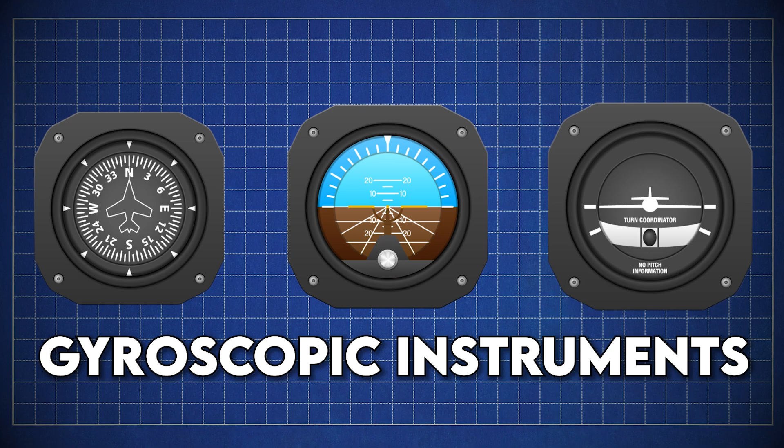Also known as gyroscopic instruments, as the name implies, these three instruments take advantage of gyroscopes to accomplish their mission of giving the pilot information on the heading, the attitude, and coordination in flight.

Gyroscopes have a very useful property in the aviation field, and this property is called rigidity in space. This is the same property that keeps a top vertical while spinning. When you spin it, it keeps spinning and doesn't easily change direction. Now, a gyroscope is just a fancy version of a spinning top.

It has a spinning wheel inside of it that can freely rotate in any direction. When the gyroscope is set in motion, the spinning wheel creates a kind of spin force that wants to keep the gyroscope spinning in the same direction. Just like this, it doesn't really want to tip over like when you spin it. This spin force is what gives gyroscopes their special ability.

If you try to tilt or move the gyroscope, it pushes back in the opposite direction to resist the change. It's like it has a mind of its own, wanting to stay in its original position. This ability of a gyroscope to resist changes in its orientation is called rigidity in space, meaning the gyroscope's spinning wheel wants to stay in the same direction, no matter how the rest of the world or plane is moving around it.

All these instruments have their own spinning gyroscopes powered by either the electrical system or a vacuum air pump spun by the engine. If there is an issue with these instruments not working, it can usually be attributed to the vacuum air pump providing insufficient air pressure to the gyros. The gyros are then connected to the interface by links and delicate rods to detect small changes in the force being applied by the gyro.

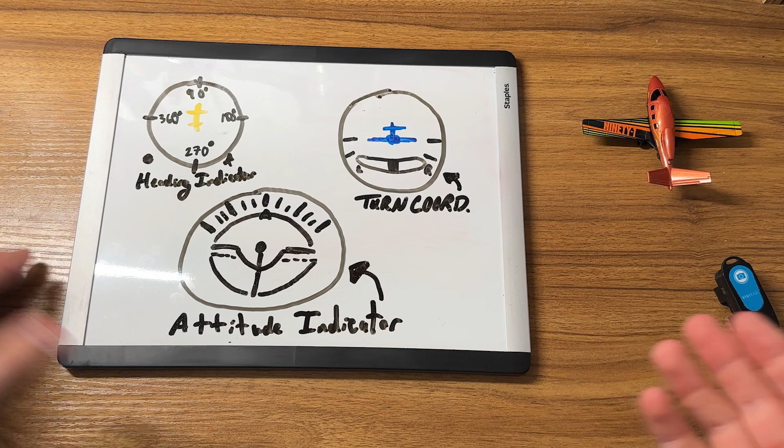It's only working when they're running. Since the gyroscopes also turn off with the plane, if you turn off the plane on the ground at a heading of 60 degrees, or 90 degrees in this case, someone moves your plane over to make room for their Rolls Royce. Let's just go ahead and use this example right now.

My Rolls Royce has not come in yet. So let's just act like this is a Rolls Royce.

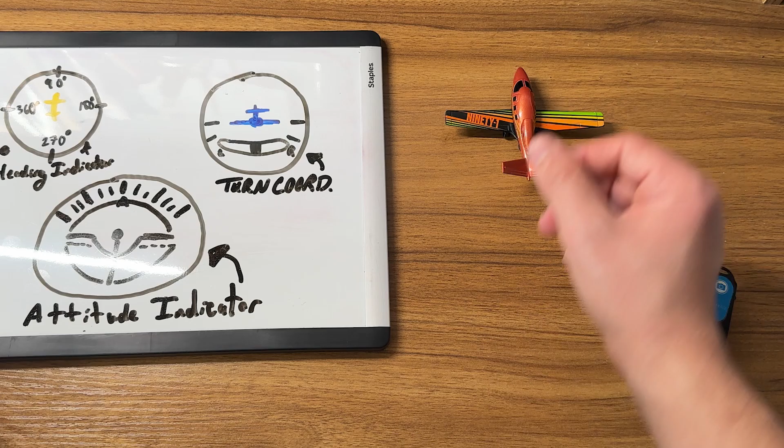When we have the plane right here at a heading of 90 degrees, we're going to turn it off. The gyroscope in this actual indicator is going to be turned off and stuck on 90 degrees. Here's little Warren Buffett with his Rolls Royce - I don't even know if he has one, but he wants to park his plane right there.

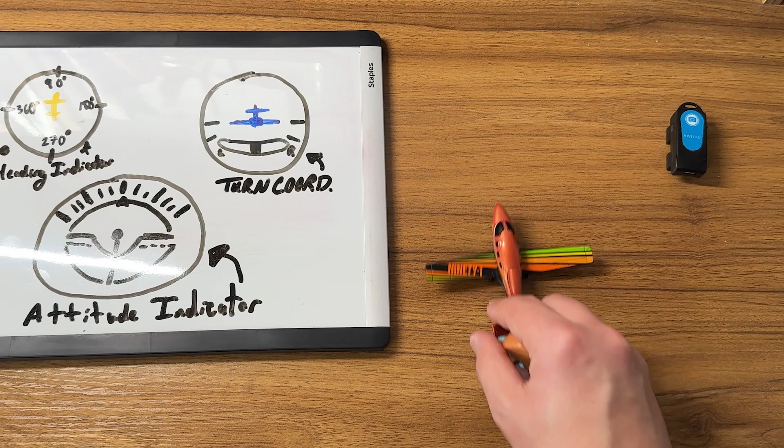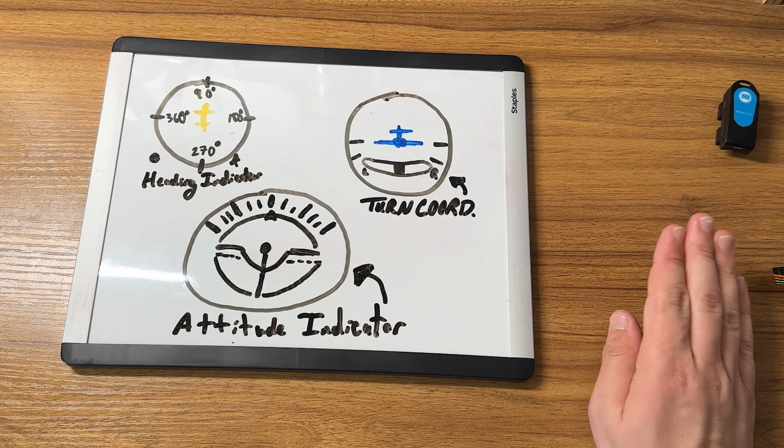He's going to tow it and move it to a heading of 360, moving his Rolls Royce right there. Next time you turn on the plane, it is going to be saying the heading is here, but you're actually headed right there. That can be absolutely detrimental in a variety of different flights. But when you go back to flying, the heading indicator will still be at 90 degrees. Can you tell I've made this mistake before?

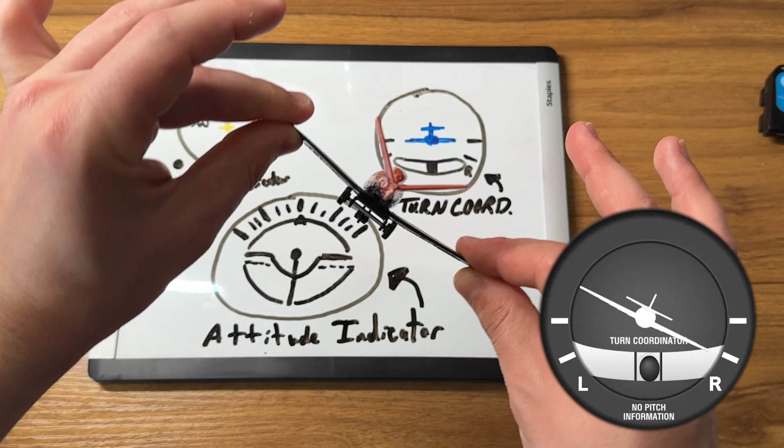The second part of the six-pack is located at the bottom left or the top right in this drawing, and it is the turn coordinator, which indicates the direction of roll, the rate of turn, and slip. It indicates the rate and direction of roll, which is how you're going to be turning, just like this - a little reminder from episode 1. And any slip, which is nose outside of a turn, or any skid, pointing into a turn - all that indication is considered the yaw of an airplane.

The roll is clear to see from the instrument as the little plane rolls left or right. So does the big one you are sitting in, laying in, or standing in.

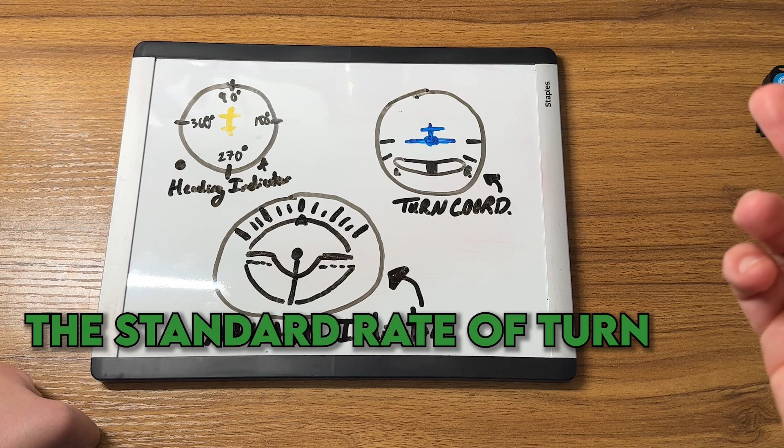The rate of turn is indicated by the little white tabs on the left and right - if you ever forget, there's a little L and a little R. When the wingtip on either side is in line with the lower white tab, you are making a standard rate of turn, which is 3 degrees per second or 180 degrees per minute. This means if you were stuck in a cloud while flying and need to turn around to get out of it, look at your watch and this instrument. Make a standard rate of turn to either side until the wing is in line with the white tab. Wait 1 minute to go back to straight and level flight, and you will find your way out of the clouds soon enough. Or you could just use your heading indicator - that works too.

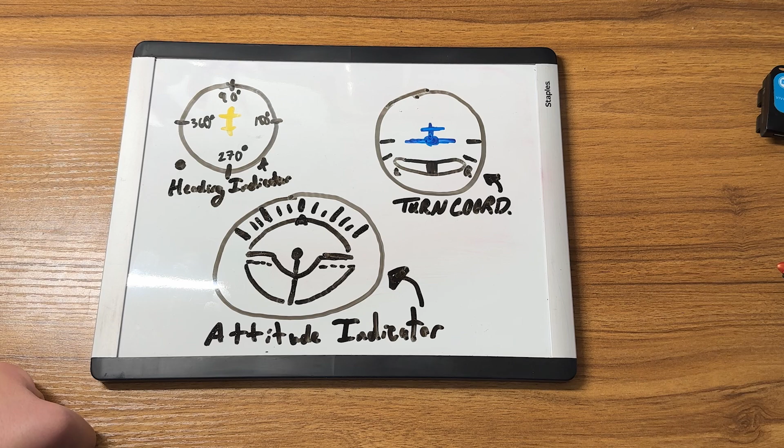The slip or skid indicator is on the bottom of the instrument. It's also called the inclinometer - a very weird word to say that no one ever uses, but it's also called that. This measures the yaw of the airplane, which is the orientation of the plane with respect to the vertical axis, just like we talked about in episode 1.

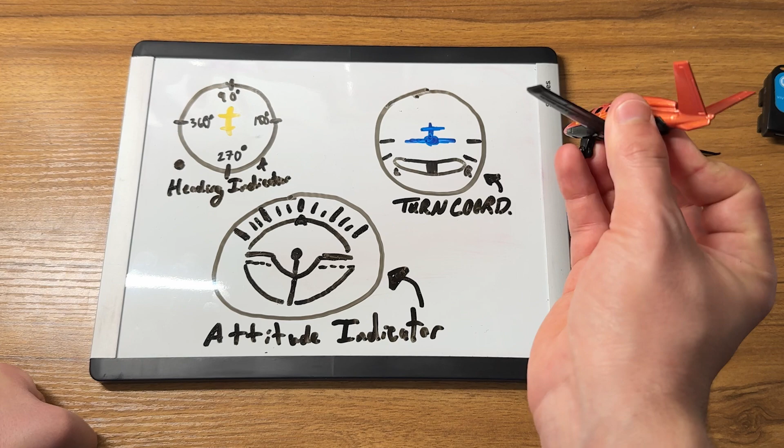When the little ball is on the left side of the plane - this little black knob is actually a ball that can move a little bit to the left or right - this just indicates that the tail is either to the left or right. When the ball is in the center of the two black lines, then your nose and tail are pointed in the direction of the turn and you're considered coordinated. If the little black ball is moving to the left or right, you are in an uncoordinated turn.

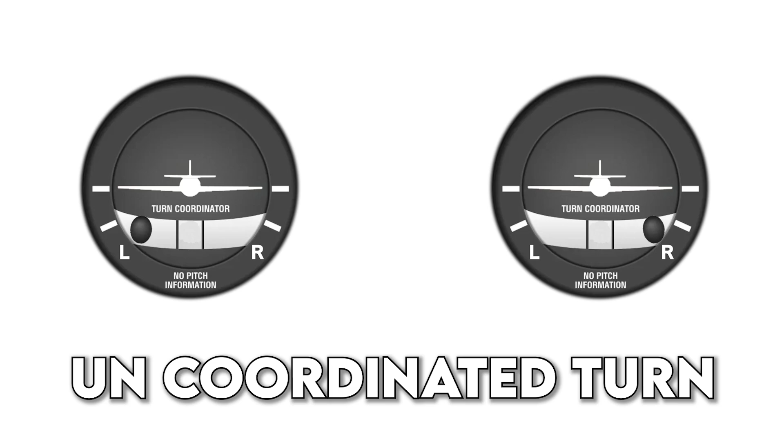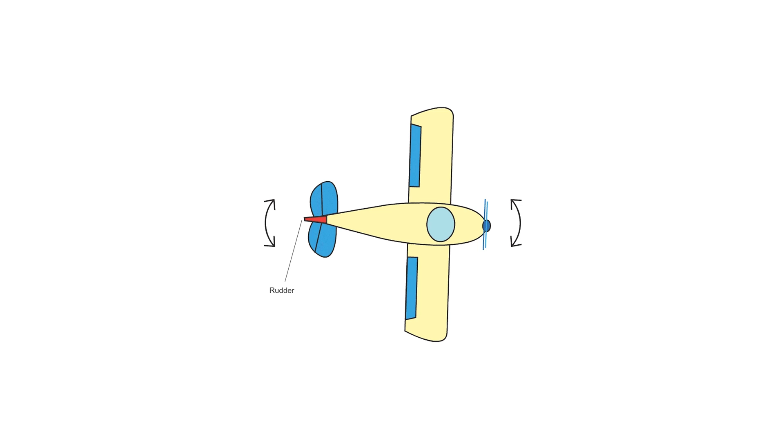To fix this, you will step on the ball - that is, push your foot on the rudder pedal at your feet on the side that the black ball is moving towards. This moves the rudder, typically the vertical control surface on the empennage, in the direction you are stepping in, effectively adjusting the yaw of the airplane before it becomes an issue.

The instrument's vacuum or electrical system is usually running separately from the rest of the gyros, typically electrically too, to make sure you at least have this instrument in case the main vacuum pump fails.

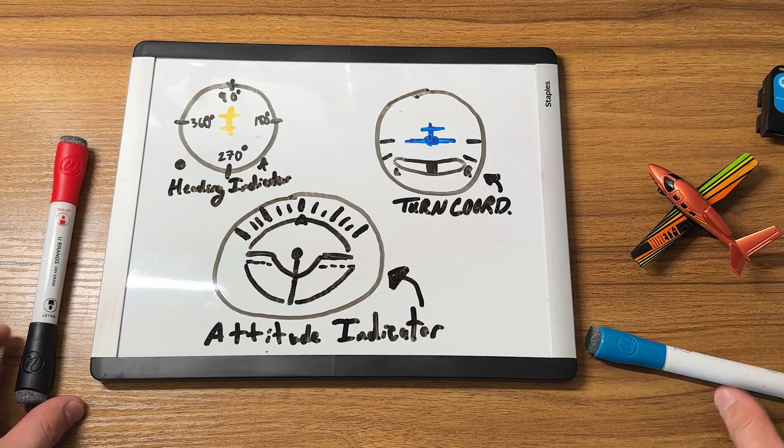The last gyroscopic instrument we are going to go over is the attitude indicator, or the artificial horizon. It shows banking information just like how the turn indicator does, and how high or low the nose of the plane is pointing, aka pitch information.

The banking information is displayed with the white lines - they're black here, but it's a white board - and an arrow at the top of the instrument. Each line symbolizes 10 degrees to the left or right in roll, and a skip to 60 degrees right over here. The pitch is displayed as the artificial airplane in the middle, which can be adjusted with a knob on the bottom that I did not draw in as well.

That's basically the knob, and the degree pitch lines above and below the artificial plane. I'm not sure why they really call it an artificial plane anyways. I mean, aren't all planes artificial?

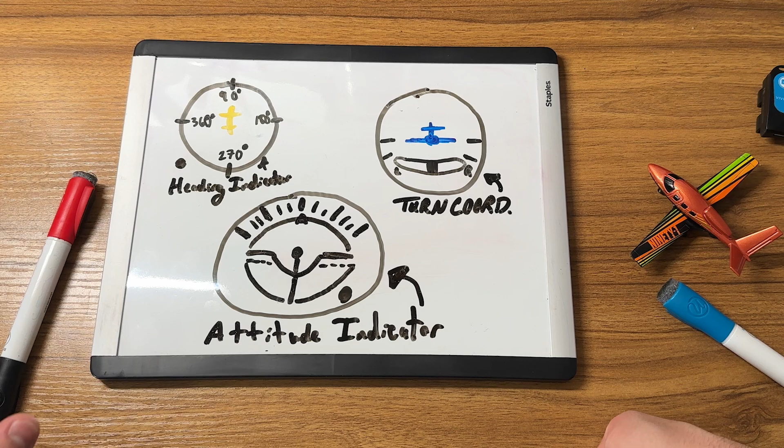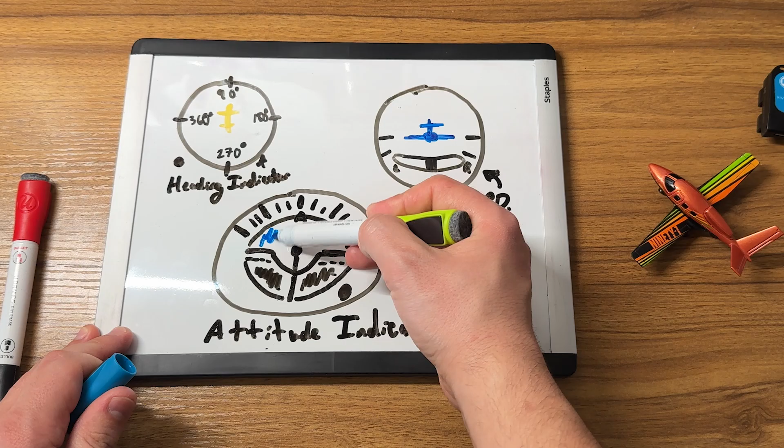The last important bit of information you need to know is it's always blue over brown, or black, depending on the indicator, but blue is always on top. That means the blue, or artificial sky, is always meant to be on top of the brown, the artificial ground.

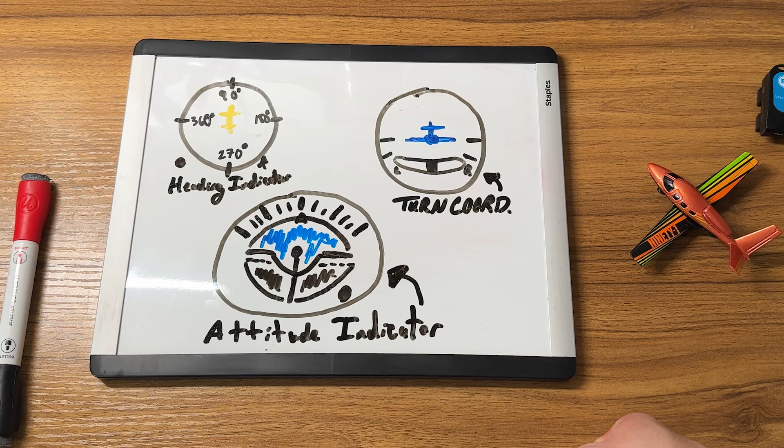It may sound simple, and what situation would ever make that information useful? Well, I'm glad you asked. It's when you have no reference to the horizon anymore, like in a cloud or during a dark night where the horizon blends in with the sky. That's when it's very useful.

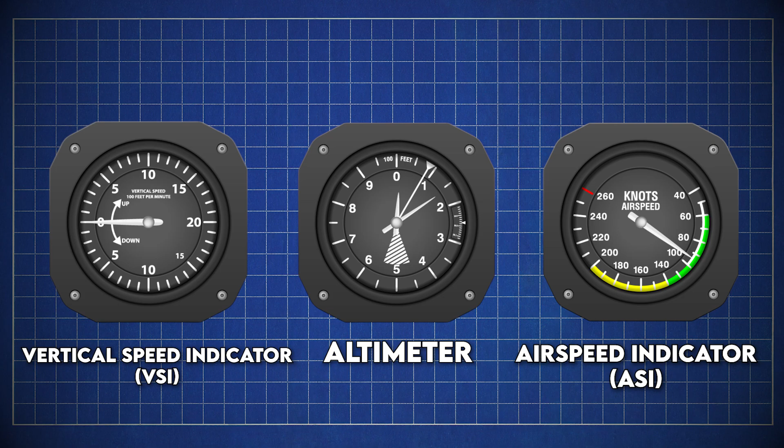The last three instruments we're going to go into detail on, and we're going to go into a lot of detail, in the standard six-pack are the vertical speed indicator, or VSI, the altimeter, and the airspeed indicator, or ASI. These are all made possible by the Pitot-Static system in the aircraft.

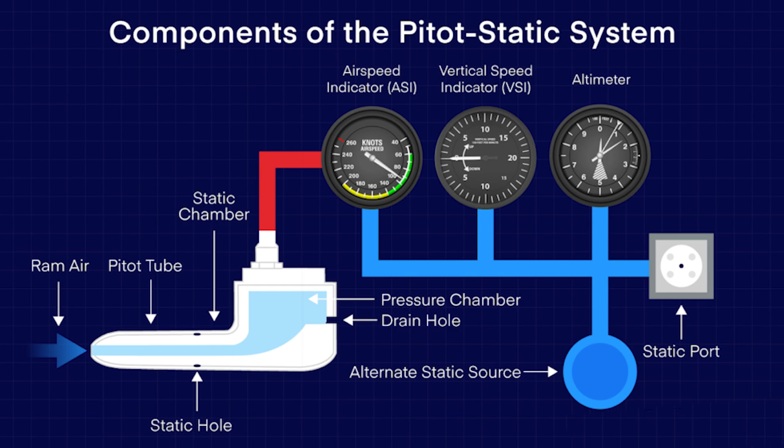To understand how the system works, you have to understand the two different parts, the pitot and the static ports. The static port is found flush on the side of the aircraft, which on this little guy is going to be right about here. It captures non-moving air to measure atmospheric pressure at all times.

Measuring atmospheric pressure is constantly important because it has many variables it can change with, including air temperature and elevation. On long cross-country flights with lots of changes in these variables, atmospheric pressure can change every minute. All three instruments - the altimeter, VSI, and airspeed indicator - use the static source to constantly check atmospheric pressure for instant and accurate readings.

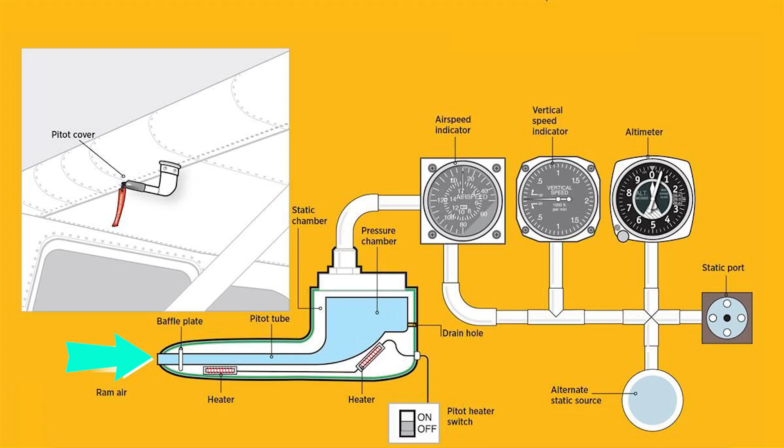Then we have the pitot part of the pitot-static system. The pitot tube is typically located on the left wing of training airplanes, pointed forward to capture ram air. Ram air is the air that the airplane comes into contact with while in motion. I remember it as the air that the plane rams into.

This air is higher pressure than the static air and only increases in pressure the faster the aircraft is moving. The only instrument that takes advantage of this tube is the airspeed indicator, and this is going to make a little more sense soon. So, pitot-static system, let's go.

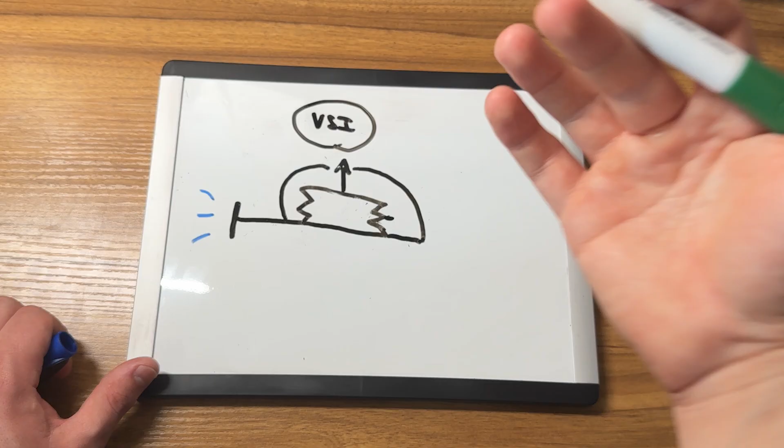Let's start with the vertical speed indicator - it does what the name says, telling you how fast you're ascending or descending in feet per minute. It works by taking the static air and feeding it into a capsule, also known as a diaphragm, in the instrument, and then feeding it outside the capsule through a small calibrated leak.

The inside of the capsule has the air pressure for the current static air coming from the static port, while the outside of the capsule has a 3-second delay of the air pressure from about 3 seconds ago. The capsule will then expand or contract if the outside air pressure is higher or lower, and the instrument displays this expansion and contraction as a reading in feet per minute.

It's important to note the instrument has a small lag, since there's a small calibrated leak, comparing the air pressure right now versus about 3 to 5 seconds ago. So if you climb a couple hundred feet, you'll be in an area of lower pressure now than you were 3 seconds ago. This makes the diaphragm contract a little and indicate a climb on the instrument.

The two flaws with this instrument are that it's a delayed instrument, which isn't very good, and it relies solely on the static tube to feed it air. If the static tube is clogged, it would read 0 or get stuck at the last indication, no matter what your vertical speed actually is.

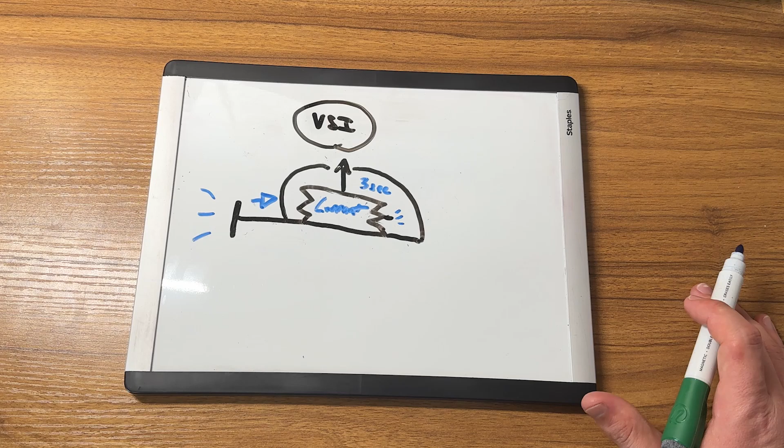At a certain point in the last 100 years, pilots found out the hard way that if we fly too high, the air gets too thin to breathe, and we would fall out of the sky. Thus we invented the altimeter, because carrying an 18,000 foot ruler was just too heavy. The altimeter will become one of the most used instruments in your flight training, and we'll be going over it for a good minute so you know exactly what you're talking about when you take your exams.

The altimeter's job is to measure the difference in altitude between you and sea level, effectively telling you how high you are. It accomplishes this in a similar way to the vertical speed indicator, except with no calibrated leak. The static port fills the diaphragm with static air, while the diaphragm itself is covered in air similar to sea level air pressure.

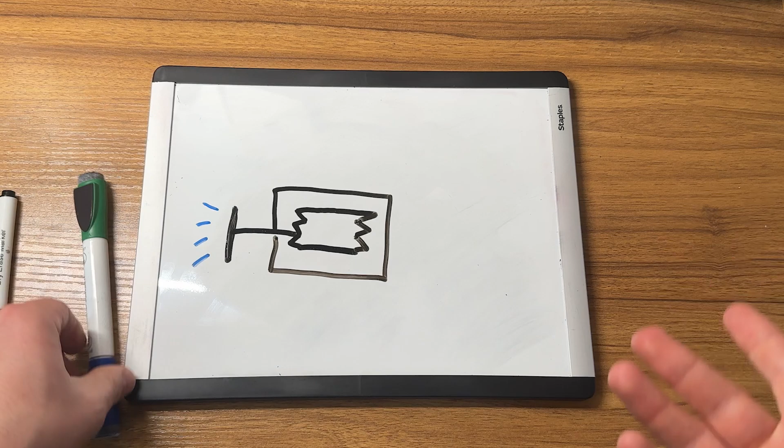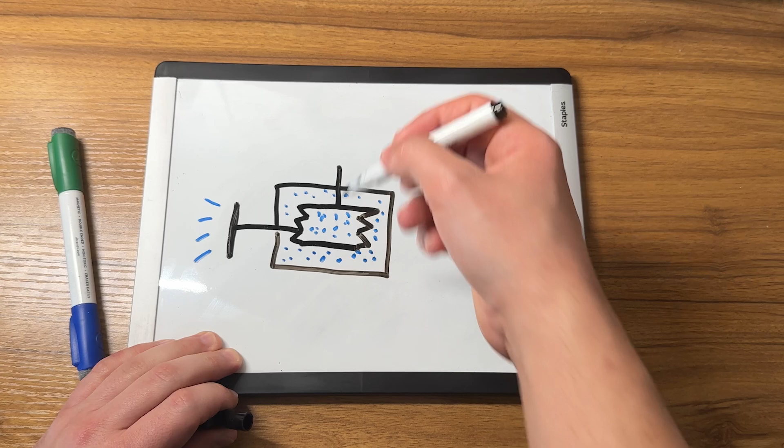So there's one air pressure outside of the diaphragm, and another air pressure inside the diaphragm. The diaphragm expands or contracts according to the actual air densities, giving you an actual altimeter reading.

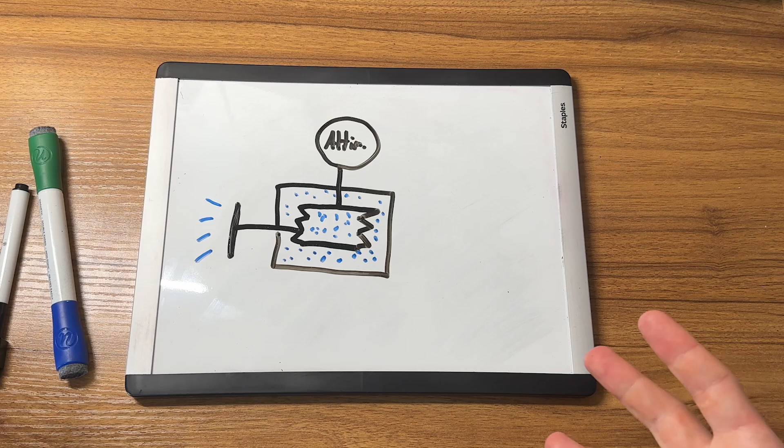To read it, you look at it just like hands on a clock. The smaller hands read bigger increments, and the bigger hands read smaller increments. The smallest hand counts 10,000 feet above sea level, just like the hour hand. The middle hand is middle length and represents 1,000 feet above sea level, like the minute hand. The longest hand represents 100 feet above sea level, like the seconds hand.

The main issue with the altimeter, other than the fact that this is not a great drawing, is the same issue the vertical speed indicator had: if the static port is clogged, the altimeter will stay stuck at an altitude reading no matter the change in altitude.

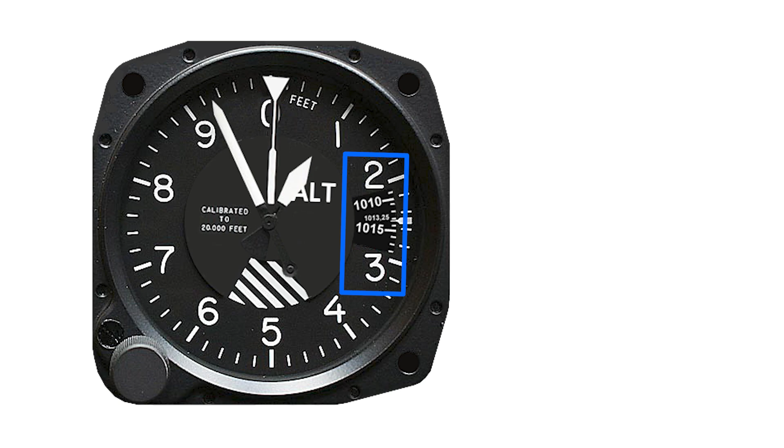This is a great time to talk about the different types of altitude. You may notice there are some tiny numbers that don't seem to mean anything. That little window in an actual altimeter is called the Kollsman window, and the number in there is called the altimeter setting. It's typically provided to you from air traffic control or ATIS, the Automatic Terminal Information Service. More on all of that later.

In the Kollsman window, you must adjust it according to the current setting to get an accurate above-sea-level reading at all times, since atmospheric pressure can be constantly changing. The altimeter setting is an adjustment you make so that you're actually reading accurate height, and therefore true altitude will be shown no matter where you go.

If you do not correct the altimeter setting on a long flight, you could, for example, be expecting to be at 3,000 feet above the ground, but you're really at 1,000 feet above the ground—much less room for error, and a ton of other legal issues.

You might also be thinking, Brad, why would the altimeter even bother to tell me the altitude above sea level when I have to adjust it all the time? Oh wait, you have another question—why can't it just tell me my altitude above ground level? I don't even fly anywhere near the ocean. First off, thank you so much for both of those questions. I always fly near the beach, so I can't really relate. But you do bring up a good point.

The reason we use above sea level so often is because above ground level changes so much more often—mountains and stuff—and it is less consistent, while sea level is an average that we all can agree on.

Let me get a new whiteboard so I can talk to you about different types of altitude. Just drew that—look at that little mountain and the above ground level. So neat. There are other altitudes you will need to know to stay safe and to ace your exams.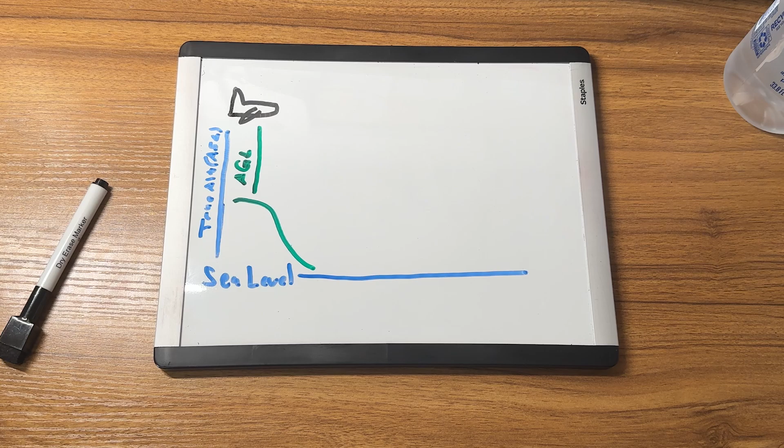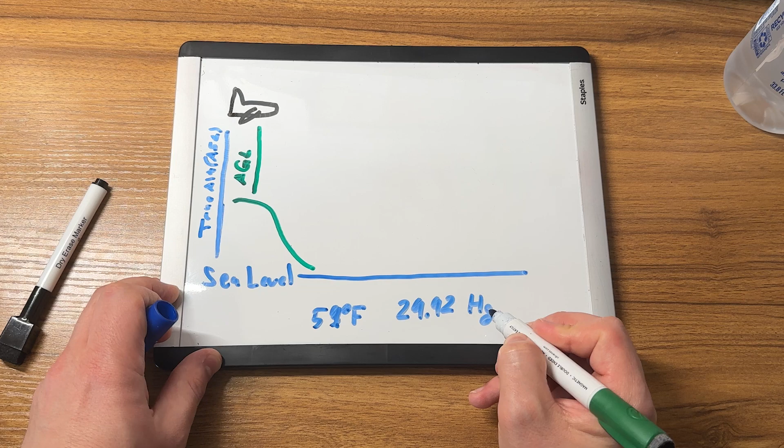There is also indicated altitude, which is exactly how it sounds—it is whatever your altimeter indicates with no corrections for non-standard atmospheric conditions. It's good to remember that standard conditions are about 59 degrees Fahrenheit, as well as 29.92 inches of mercury at sea level. We'll get into that a little more. To get the above-sea-level altitude from indicated altitude, you adjust for non-standard conditions, unless you are living a standard day.

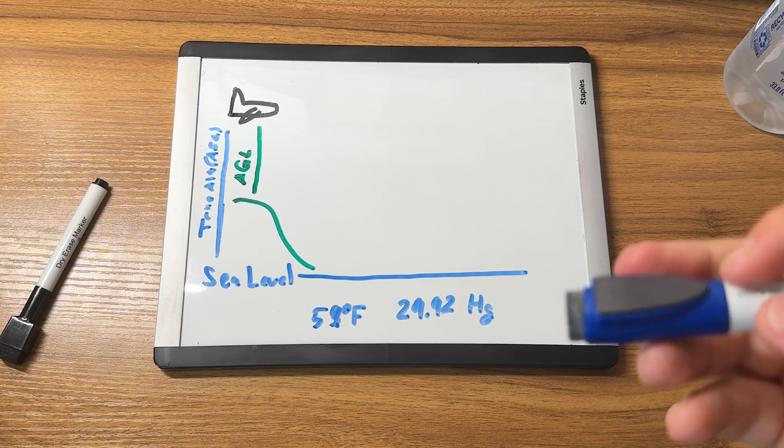Then you can take above sea level and take it to above ground level by just subtracting the ground's elevation. So if you're actually at 1,000 feet above sea level and there's a 500-foot mountain, you're only 500 feet above the ground. There is then pressure altitude, which is useful for flights over 18,000 feet.

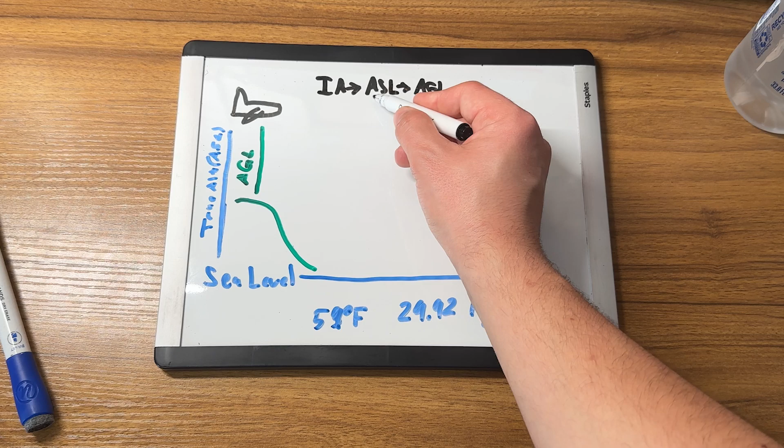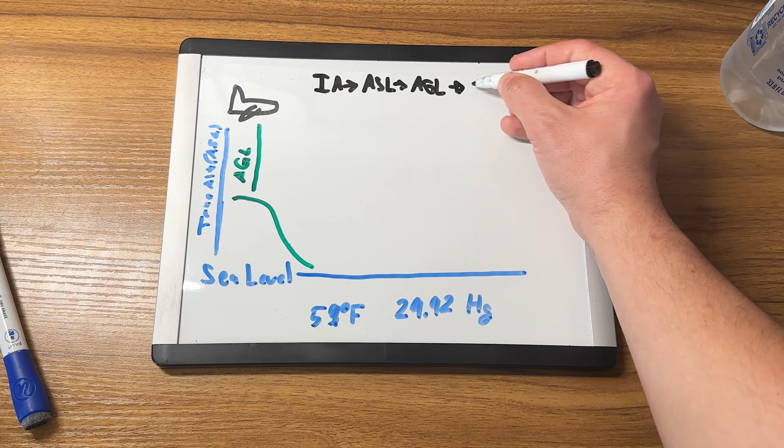Here's a little drawing real quick. You could just remember indicated altitude corrected for all the non-standard days is going to be above sea level, which is the true altitude. We can subtract the ground elevation to get above ground level. Then we get into pressure altitude, or PA for short.

Again, useful for flights over 18,000 feet and testing aircraft performance. Pressure altitude is the altitude above the theoretical plane where atmospheric pressure is the standard 29.92 inches of mercury. To calculate pressure altitude on the ground the long way, you get the altimeter setting and input it to your altimeter to get the indicated altitude. A little complicated, but it's way easier to do in flight.

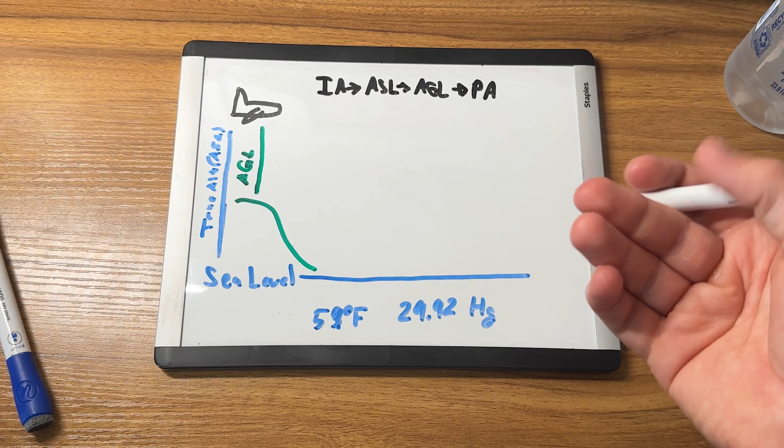You then take the altimeter setting to get the difference between that and the standard altimeter setting, which is 29.92 inches of mercury. You multiply it by 1,000 feet, because each inch of mercury equals 1,000 feet in difference, to get the altimeter correction. As an equation, the altitude correction equals the current altimeter setting, CAS, minus the standard altimeter setting, 29.92. Put these in parentheses, then multiply by 1,000, since each inch of mercury equals a 1,000 foot difference.

If we plug everything in, you take your indicated altitude and subtract your correction to get your pressure altitude. That's a lot of things right there, but once you do some examples, that will fix everything. So let me do an example for you.

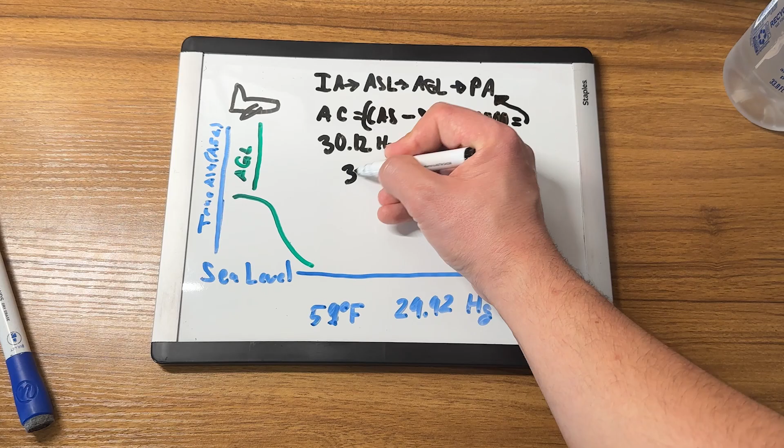If the current altimeter setting is 30.12 inches of mercury, and the indicated altitude equals 6,000 feet, you just plug that in: the CAS is 30.12 minus 29.92, and then we multiply whatever that ends up being by 1,000, which ends up being 0.2 inches of mercury.

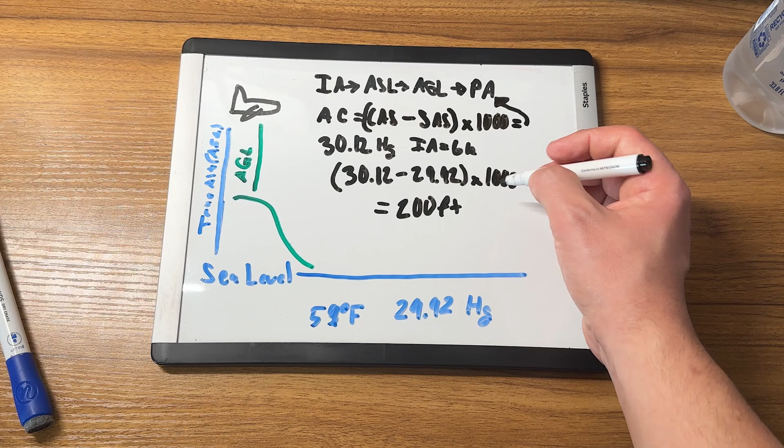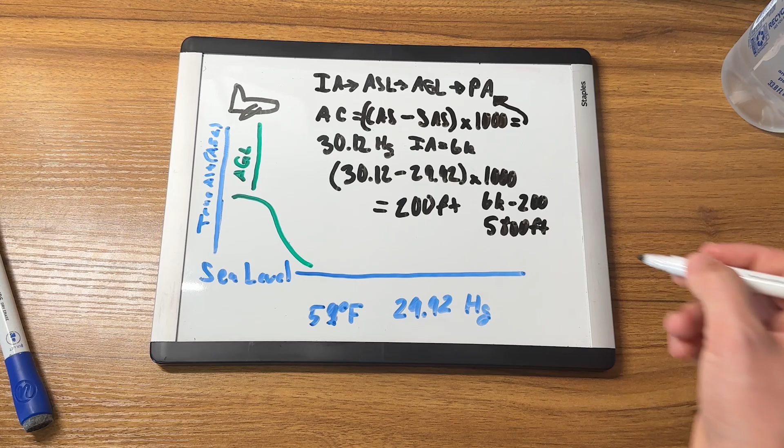So you multiply that by 1,000 to get 200 feet, and then you take it from the indicated altitude. The indicated altitude is 6,000, and this time we're subtracting it, giving us 5,800 feet. I made a bit more of a mess than expected, so I'm going to erase that — take a screenshot if you want it, and I'll be back in a second.

Finally, you have density altitude, DA, which is just pressure altitude corrected for non-standard temperature variations. Remember that — it represents the density of the air in relation to the standard atmosphere. It's used to assess aircraft performance as it affects engine power and aircraft lift.

So it's the most important one, and you're going to have to go through all of that to figure it out. For exams, or if someone throws an EMP into your airplane, you will need to know how to calculate these without a phone or calculator. That said, once you pass your exams and make sure no one brings any EMPs onto your flights, the app does it for you.

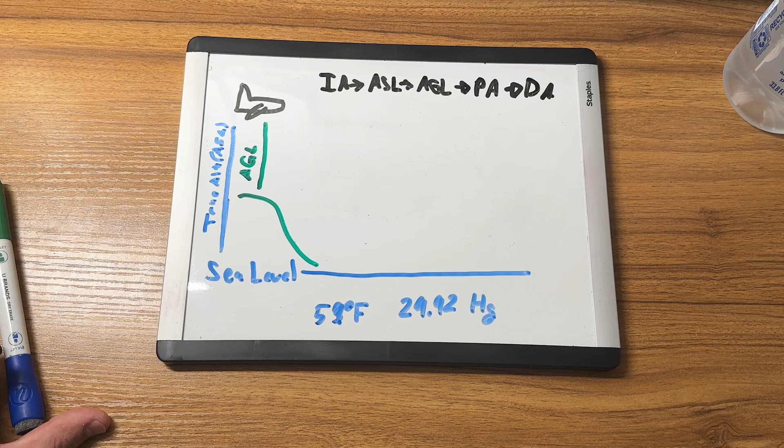Until then, here are your choices: you can memorize this equation, you can use this graph, that graph as well, or you can use an E6B calculator. Later, I'll show you how to use an E6B calculator in the flight planning video, but today I'll explain how to use the graph since it's quicker and you have to learn it anyway for your exam.

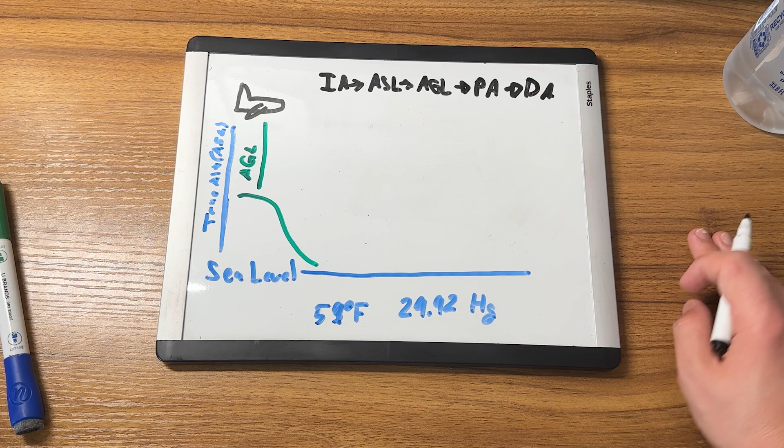Sweet, now give me a second while I go grab it. Look at this little density altitude chart that you guys are going to want to be able to use. First off, we can see it's not like a normal graph we'd usually use — the output is on the y-axis, and the input is on the x-axis, which is normal, but it's also just lines all across the page, and then there's a table.

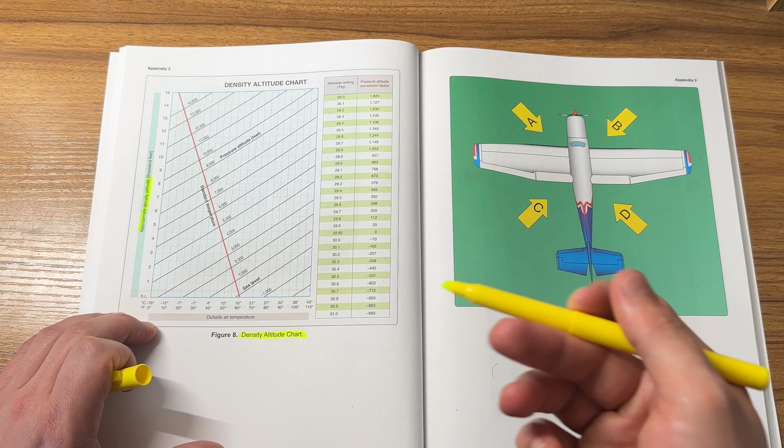What do we do? First, let's start by noticing the pressure altitude — that's where we need to start off. We need to finish through the example we went through earlier just to find that point. We can see there's a big line for standard temperature, which we could actually use for an example.

Let's go ahead and use the standard temperature, which is just going to be a little bit lower than 60, so 59 degrees Fahrenheit, which we could use. See that right there? Fahrenheit's right there.

Let's just say pressure altitude is going to be 5,000 feet exactly. So we literally just take the 5,000 right there, which is the pressure altitude. That's going to be our input. We're going to see the 59, and we're just going to follow a line up here. And once they cross, you go directly to the left.

As long as this line is basically straight, with standard temperature, pressure altitude is approximately equal to density altitude. And that is also assuming a normal altimeter setting of 29.92, which is the standard, and there's no line for that.

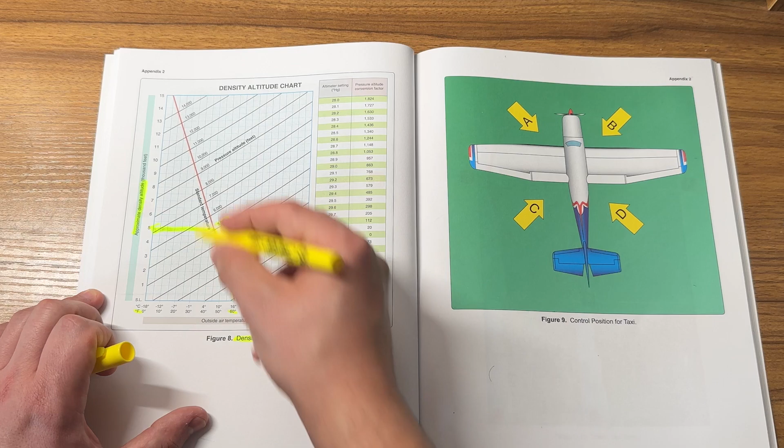If it was non-standard, let's just say an easy one, 28.8 even, we would be adding 1,000 feet, so the density altitude would actually be 6,000 feet. Does that make sense? Let me know in the comments if I did all right at explaining this.

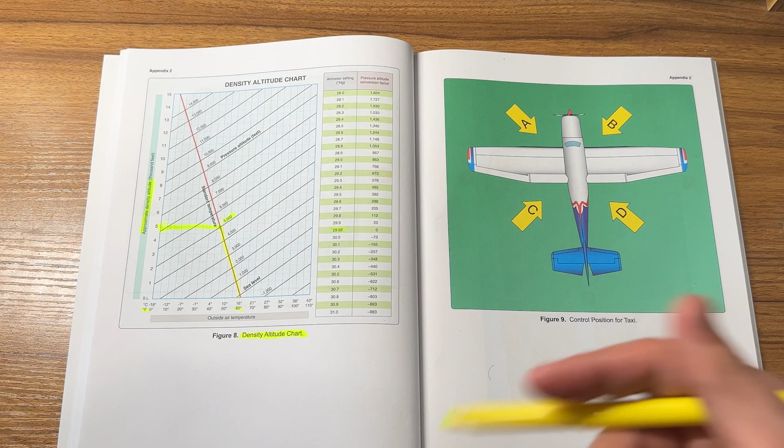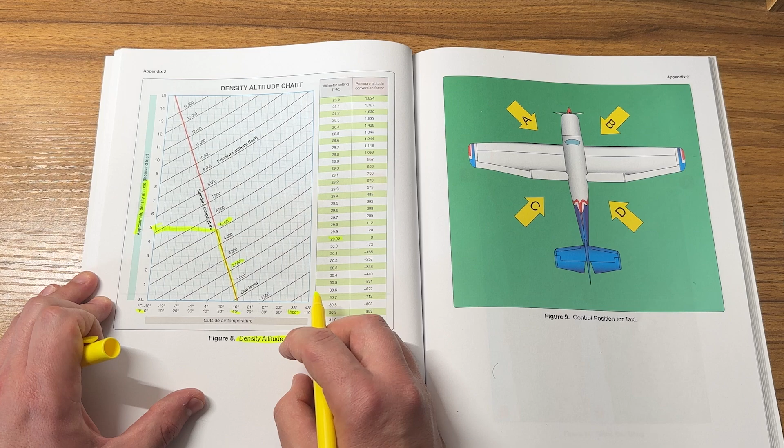Let's do another example. Let's say that the pressure altitude is 2,000 feet, and the temperature is 100 degrees Fahrenheit. All we're gonna have to do is follow about a parallel line, all the way to 2,000. There we go. And all we have to do is track that all the way straight to this.

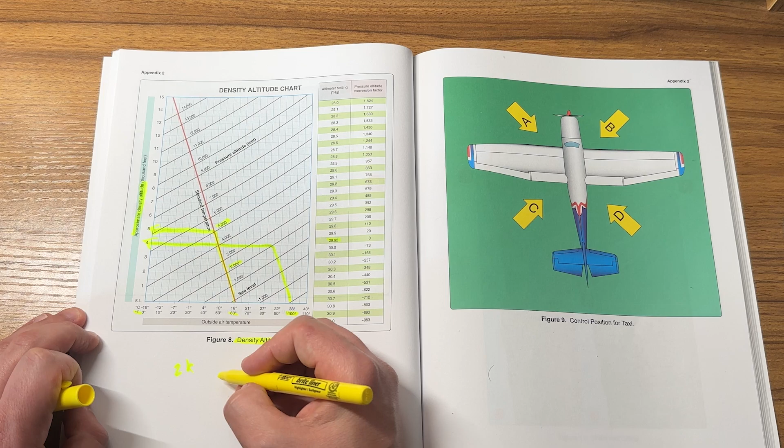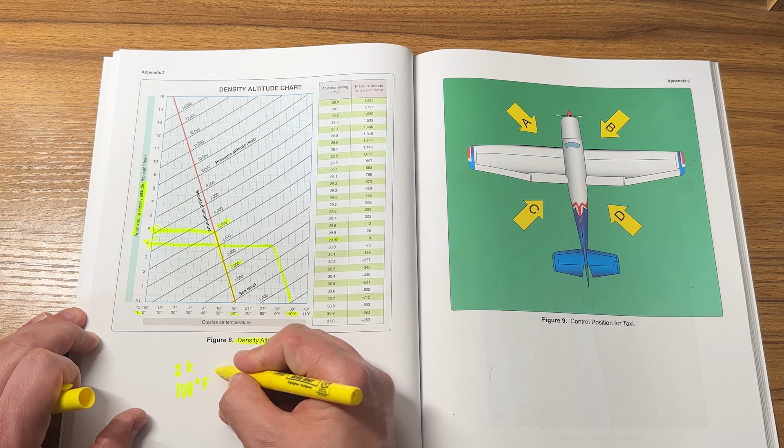What do you know? If you have a pressure altitude of 2,000 already, and you have a temperature of 100 degrees Fahrenheit, as long as the altimeter setting is 29.92, the density altitude is equal to approximately 4,000 feet. Look at that. CFIs fact check me later.

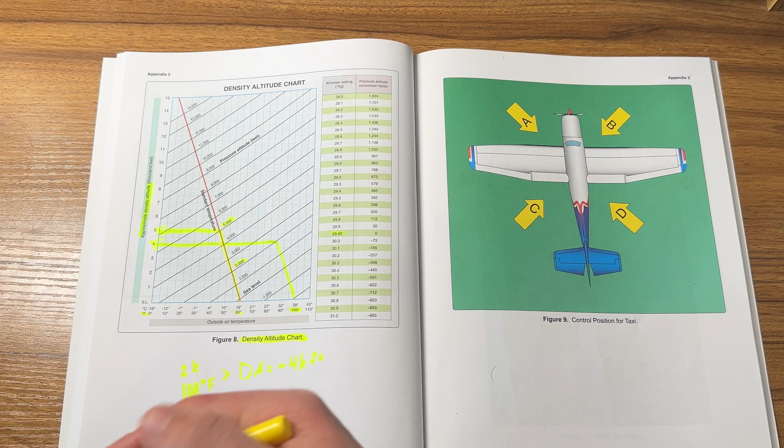Awesome. Sweet, we went through that graph, and congratulations, you don't actually have to memorize that equation at all. Look at you. Already done. And now you have density altitude.

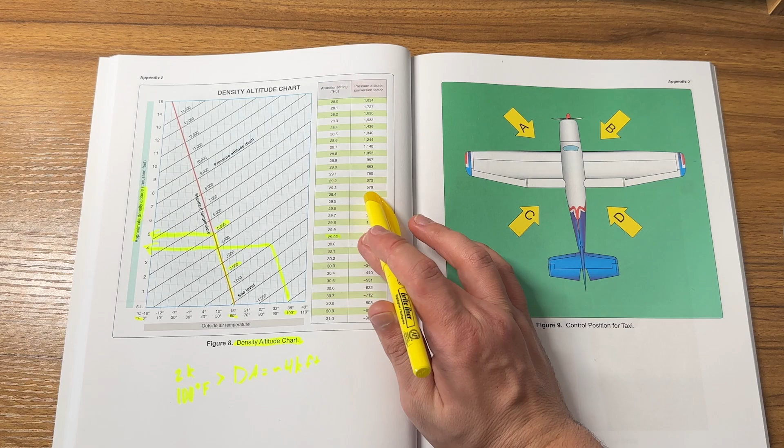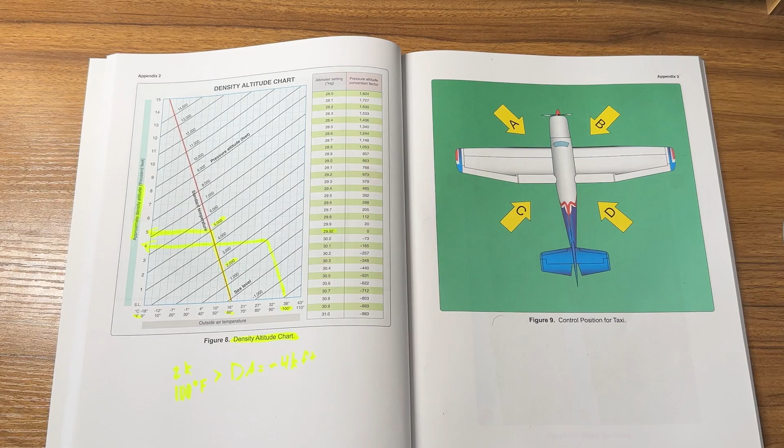Really quick, while I have you here, I'm going to give you a little bit of a life lesson. If you are on the ground and there is no air traffic control or ATIS, you can actually work backwards by getting the elevation of the airport you're at, which you should always know, and you could work backwards to find your altimeter setting. All you have to do is know your altitude, adjust the knob to read that altitude, and congratulations, you have the altimeter setting. Bam, magic, absolute magic. If you learn nothing, you know that. Actually, you should know all of this stuff, but there we go.

Now that we have 5 out of the 6 pieces to the 6-pack, let's just move on to the last part. The last part of the 6-pack is the airspeed indicator.

And I'm going to be so honest with you, I tried to make this, oh man, it did not work out very well, so I'm just gonna be using this. There we go. It is the airspeed indicator, and it works by comparing the ram air. I tried drawing that too, right there. It compares the ram air from the pitot tube to the static air from the static port using a diaphragm.

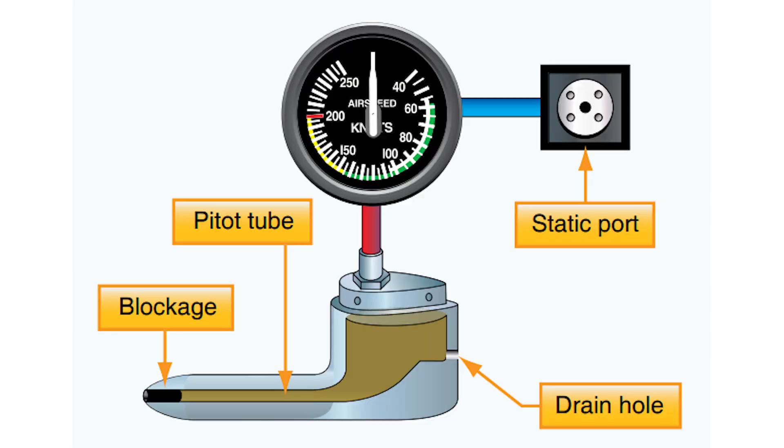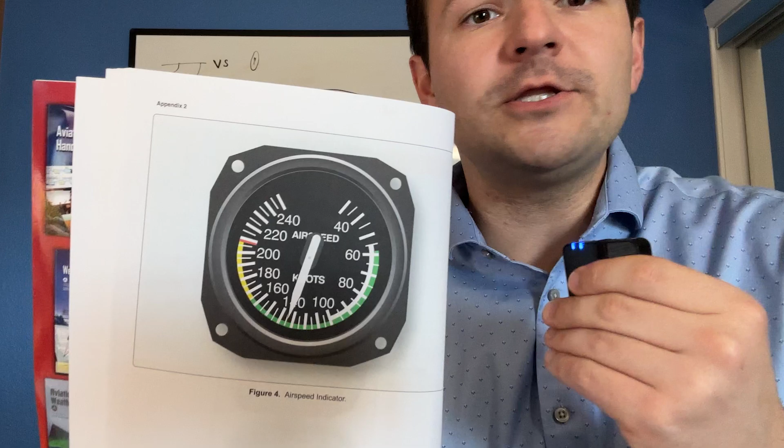Like other pitot-static instruments, since it uses both systems in conjunction, if either one gets clogged then there will be issues. If the pitot tube gets clogged, then the airspeed will read 0 because all the air pressure will leak out the drain hole in the pitot tube. If the pitot tube is completely clogged, then the airspeed indicator will work like an altimeter. It will increase with climb and decrease in a descent.

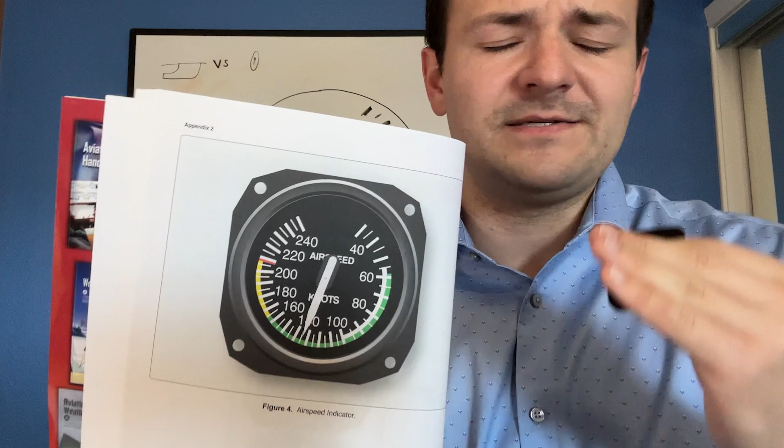Not very helpful. If the static port is blocked, the altimeter and the vertical speed indicator will get clogged, and the airspeed indicator will read lower than accurate in a climb and higher than accurate in a descent. Not great, very bad issues. I promise this is the last bad thing I'll say about the airspeed indicator.

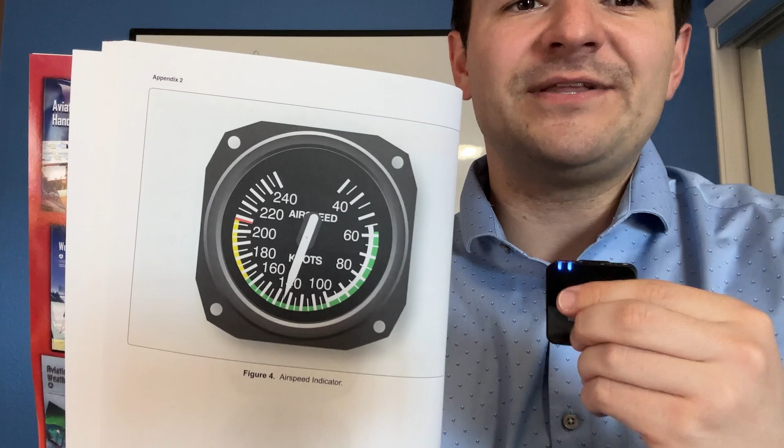If your angle of attack is not 0 degrees, then there will be at least a slightly low reading on the airspeed indicator because of all the ram air not getting in. It's more than likely not flowing directly into the pitot tube.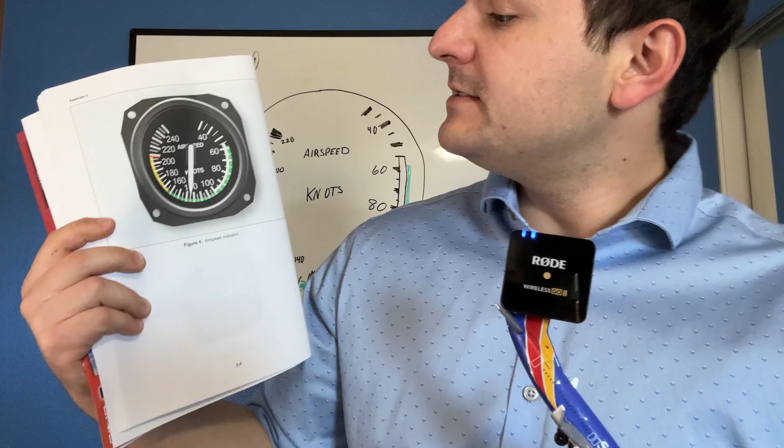Now, with all those disclaimers out of the way, let's learn how to read this and put it to good use. Reading the speed is not too difficult. You can see that on the airspeed indicator on my right, it reads, let's see, 100, 110, 120, 130, 135 knots.

What's really important is knowing what these numbers really mean. The really important numbers are called V speeds, and the really important V speeds are indicated on the airspeed indicator. You'll need to study the POH for your plane's make and model to ensure you know your specific craft's limitations and safe operations.

Let's get started with the lowest airspeeds, looking at this figure. The thick white arc connecting the notches indicates the range in which the flaps on this plane can operate. The beginning of this range is designated as VSO, the power off stalling speed with the landing gear down and flaps extended, which is 55 knots on this. The end of the white arc is designated as VFE, flaps extended, the top speed you are structurally able to fly with the flaps extended, which is 100 knots here.

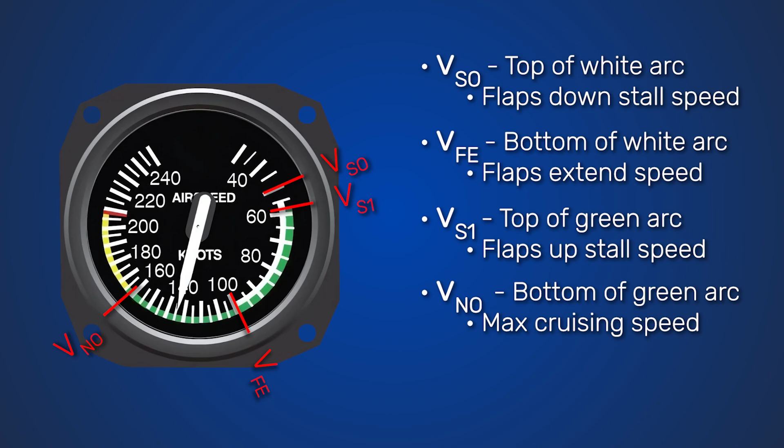The green arc indicates the normal operating range for your airplane. The beginning of the green arc is designated as VS1, the power off stalling speed with the landing gear and flaps retracted. The end of the green arc and beginning of the yellow arc is designated as VNO, as in no, don't go that fast. VNO is the maximum structural cruising speed. Operations above this speed are only allowed in smooth air, as a good gust of wind above this speed can cause permanent damage to the plane.

The end of the yellow arc, and the entirety of the red arc—it's really more of just a mark, not an arc—is designated as VNE, also known as never exceed speed. If you go over this speed, it is significantly likely that you will either lose control of your plane and fall out of the sky, or cause serious structural damage and fall out of the sky.

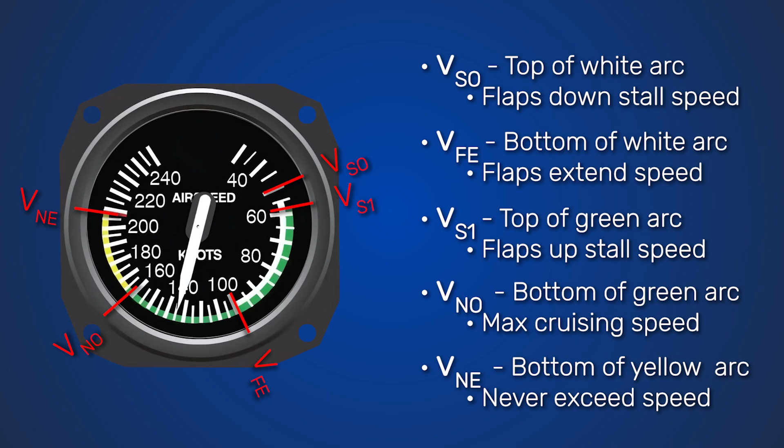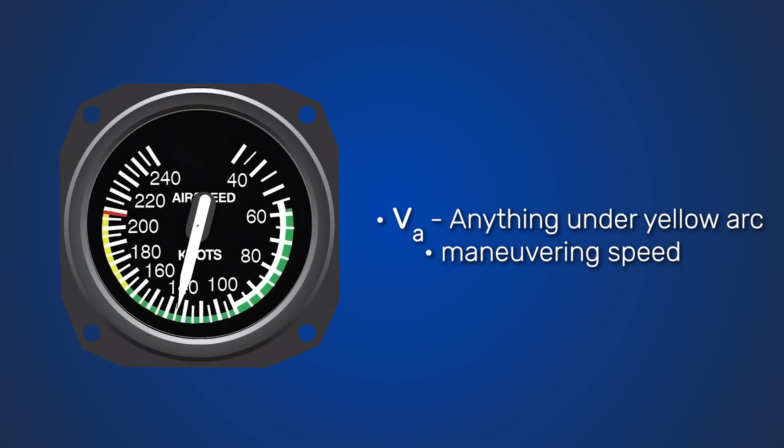Not very good. The last three V-speeds you need to specifically remember for your aircraft are not found on the airspeed indicator. That is VA, maneuvering speed, which is technically, in this case, anything under the yellow arc. The next one is VX, best angle of climb speed. This is the airspeed that provides the greatest gain in altitude over a horizontal distance during a climb. It allows the aircraft to clear obstacles in the shortest distance.

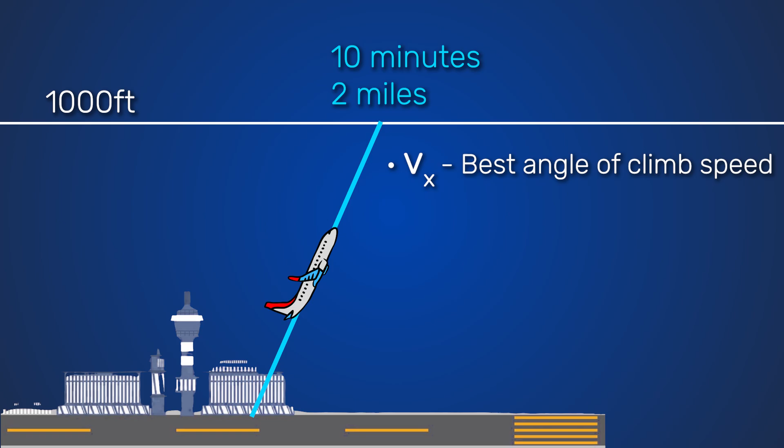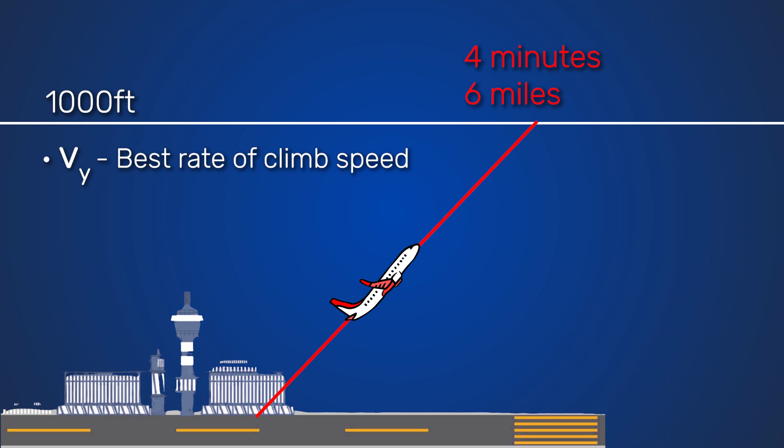And the last one is VY, best rate of climb speed. This is the airspeed that allows the aircraft to achieve the maximum rate of climb per unit of time, providing the best climb performance in terms of altitude gain over time. And sorry, there was a fourth one, because there is VG, the best speed to fly at with no additional power to give you the farthest glide. You use VG in examples like when your engine is out and you are trying to do an emergency landing. That happens a lot on your exams.

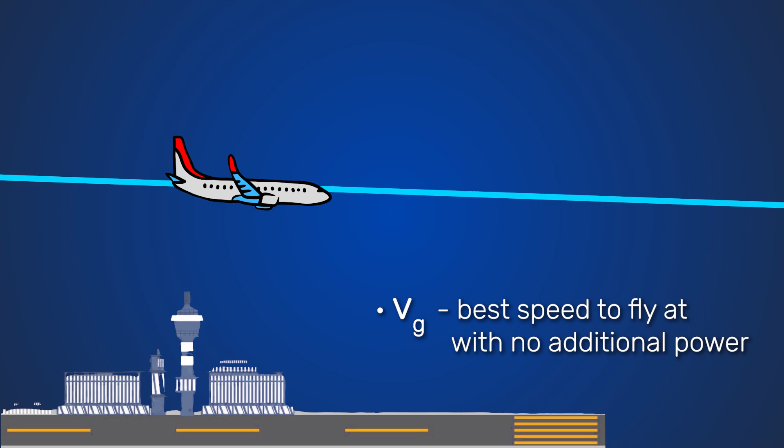These V-speeds are all measured as indicated airspeeds. That is how fast the ASI, or airspeed indicator, is indicating how fast it is going through the air. For safe and efficient flights, and more importantly, your exams, you need to know the four different types of airspeeds: indicated, calibrated, true, and ground speed.

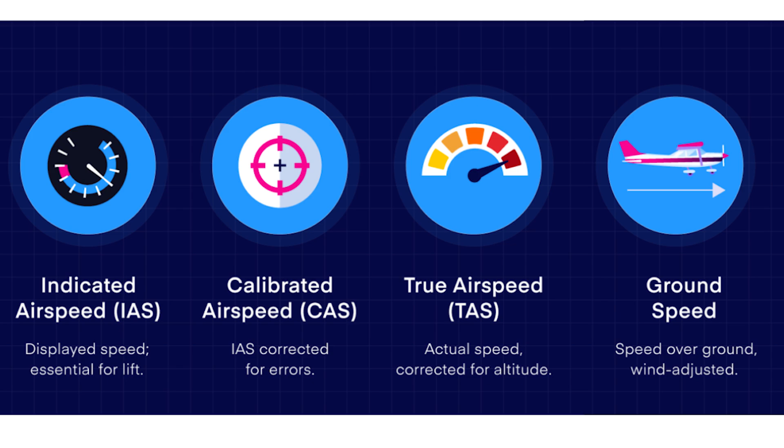Just like there are different altitudes, there are different airspeeds. If you took indicated airspeed and removed all of the mechanical error in the placement of the tubes and any error in the instrument, you would get calibrated airspeed, usually not more than 2 to 3 knots off. If you took calibrated airspeed and adjusted for less drag at higher altitudes, you would then have true airspeed.

As you increase in altitude, the air gets thinner. Given thinner air, the airplane experiences less drag. This decrease in drag leads to an increase in airspeed that is not picked up too well by the airspeed indicator, given the drop in air temperature and pressure and all of that. This difference between indicated airspeed and true airspeed is most notable when flying to a high elevation airport, like Big Bear Airport at 6,500 feet.

And if you were to take true airspeed and account for the wind hitting your airplane, then you would have ground speed, or GS for short. I'll teach you more about how to calculate this on an E6B calculator at the end of the flight planning section, but that's basically, as the crow flies, how fast you're flying in reference to the ground. So it goes indicated airspeed, then calibrated airspeed, then you get true airspeed, and then with true airspeed you can get ground speed.

In the last hour-ish, we have gone over all the instruments and all the systems of the aircraft, including the magnetic, gyroscopic, and pitot-static systems, along with their errors. As promised, in the link below is a handful of questions you may or may not see on an official FAA written exam or a final exam for a particular online course pertaining to these subjects.